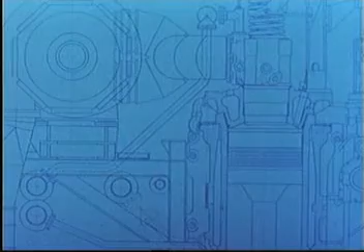The diesel engine propels half the tonnage of all the world's shipping. Given good care, the diesel engine provides a maximum of effect on a minimum of oil consumption. The engineer will see to that. At the moment, he's checking the temperatures of exhaust and cooling water.

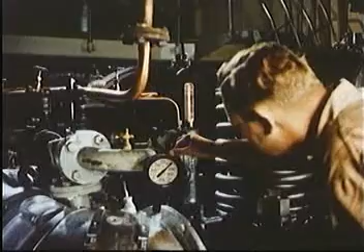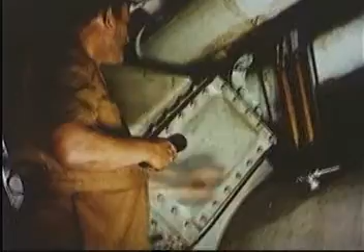His routine inspection takes him further down to the second platform with the intercoolers for charging air. Now he reaches the bottom, where his flashlight reveals the return piston cooling oil behind the sight glasses.

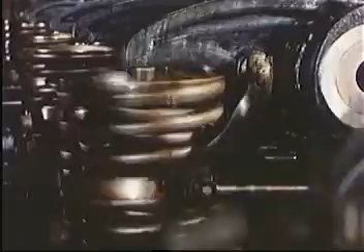To make a further study of the diesel engine, we leave the engineer and his instruments and put sight glasses on the engine from top to bottom. This reveals the movable parts: pistons, piston rods, crossheads, and connecting rod and crankshaft.

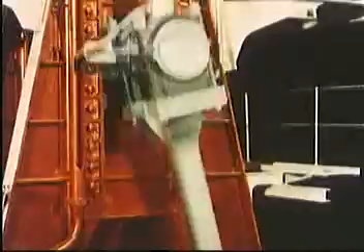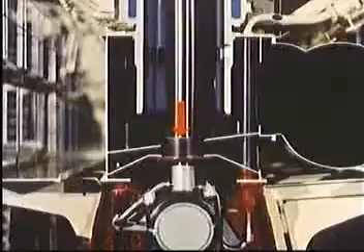This sectional view shows the function which the most important parts of the engine have to perform. In the upper part of the cylinder, an amount of fuel oil is burnt, which causes the temperature, and thereby the pressure, to rise in the combustion space. The gas pressure acts on the piston, from which the force is transmitted through piston rod and crosshead to the connecting rod, and results in a torque. The thermal energy has been converted into mechanical energy.

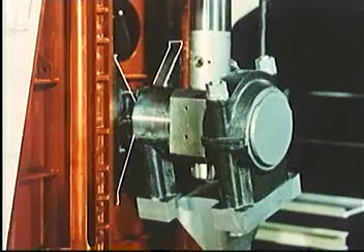In an arbitrary piston position during the working stroke, the crosshead is exposed to a vertical force from the piston rod and a force in the direction of the connecting rod, which together result in a horizontal force. This horizontal force must be transmitted to the engine frame, and for this purpose, the crosshead is provided with slide shoes supported on vertical surfaces, the guide faces on the engine frame.

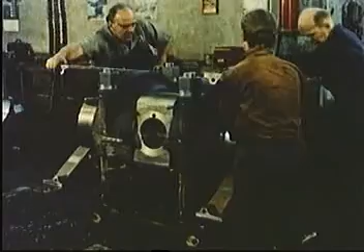Powerful forces are at work in a big marine engine, and accordingly, the engine parts are of big dimensions. In the workshop, with people providing a natural yardstick, one receives a good impression of their size. So big must the crosshead slide shoes be in order to transmit the horizontal forces. The high points in the connecting rod bearing, which have been spotted by the contact with the crosshead pin, are scraped off in thin chips.

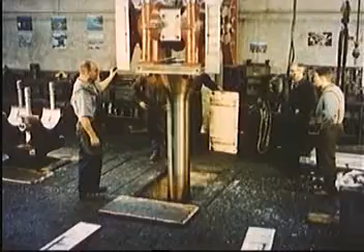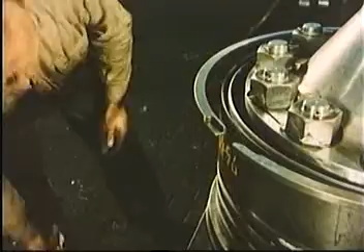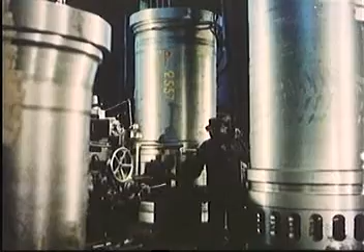To provide tightness against the high pressures, the piston is fitted with piston rings. The ring is fitted by a special tool which imparts an evenly distributed bending moment to it, thus preventing the danger of a permanent deformation. The cylinders are not easily overlooked either. The scavenge air ports are bored oblique to a diametral plane to set the scavenge air in rotation.

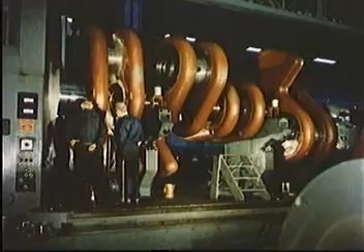The crankshaft is so big that to facilitate manufacture and installation, it's made in two halves, which are bolted together later. Each half is built up from a number of individual parts: main bearing journals, crank webs, and crank pins. The crank webs are provided with counterweights.

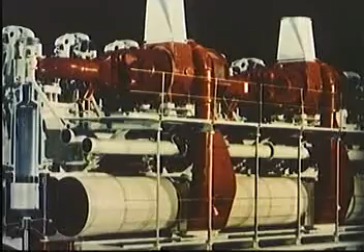Let's look a little closer at the principle on which a two-stroke engine works. Fresh air is supplied by a blower. From the blower, it's conducted in a pipe along the engine to the scavenge air space around the cylinder. When the piston approaches the end of the downstroke, the exhaust valve opens, the scavenge air ports are uncovered, and fresh air flows up through the cylinder.

Exhaust valve and scavenge air ports are then closed, and during compression, the air is heated for ignition of the injected fuel. The combustion increases the temperature and thereby the pressure which drives the piston. The exhaust valve opens, the pressure falls, and the combustion products are expelled. The air is again compressed. Fuel is injected, ignited. The gases expand. The exhaust valve opens, then the scavenge air ports. The cylinder is scavenged, and the cycle is repeated.

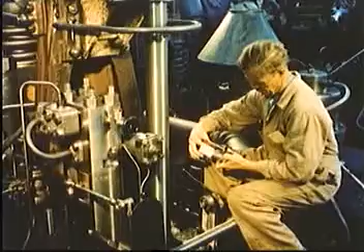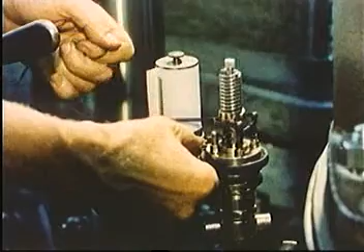The power developed by an engine depends on the pressure events in the cylinder. The pressure events can be recorded by means of an indicator connected to an outlet from the combustion space. The pencil is now moving in time with the pressure variations inside the cylinder. The drum carrying the paper is connected to the drive from the engine piston, its motion proportionate to the piston motion. The pencil records the pressure events during an engine cycle.

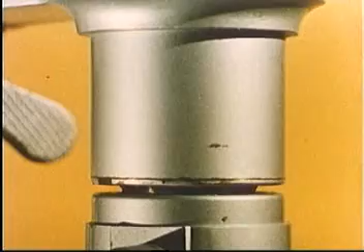The construction of the indicator is simple. Through a duct, the gas pressure is transmitted from the combustion space and acts on the indicator piston moving inside a small cylinder. The motion is resisted by a spring. This spring is exchangeable so that it may be adjusted to different pressure ranges.

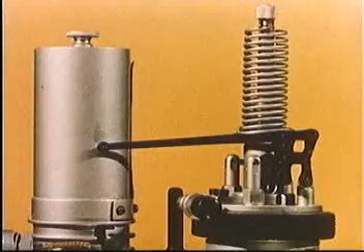The motion is communicated to a lever at the point of which a pencil is fastened. The pencil is pressed against a drum moving back and forth with the up and down motion of the engine piston. Thus, a curve is traced which shows the relation between the gas pressure in the engine cylinder and the position of the piston.

The output of an engine is dependent upon the relation between pressure and volume in the cylinders during compression, combustion, and expansion. For each separate cylinder, the indicator traces a curve, the so-called PV diagram.

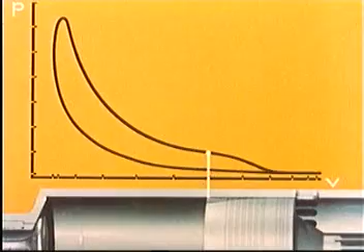The diagram shows that the pressure is almost equal to the scavenge air pressure when the scavenge ports are uncovered. The exhaust valve and scavenge ports are then closed. The air is compressed, and when the fuel is injected and ignited, the pressure will rise rapidly and remain at maximum during continued injection. After injection, the pressure in the cylinder falls to exhaust pressure, and during the exhaust period to scavenge air pressure.

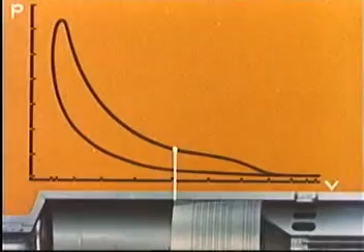Scavenging, compression, combustion, expansion, exhaust and back to scavenging. The characteristic pressures are approximately a compression pressure of 54 kilograms per square centimeter, maximum pressure 66, exhaust pressure 8, and scavenge air pressure 1.75 kilograms per square centimeter.

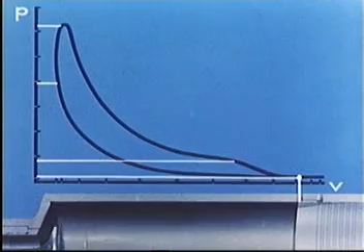From the indicator diagram, the indicated output may now be computed. At an arbitrary position of the piston during the compression stroke, there is a certain pressure, P, acting on the piston top. If the piston travels a short distance further, corresponding to delta V, and if we ignore the minimal change in pressure, the amount of work done, delta A, will be given by the pressure multiplied by the change in volume, or P times delta V. This work is represented by the area below the part of the compression line corresponding to delta V, and the same applies to every single part of the compression curve.

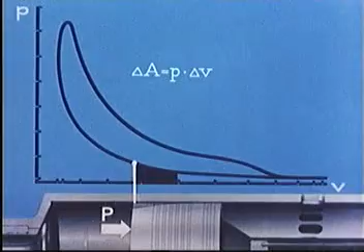That is to say that the whole area below the compression line represents all the work that the piston must perform to compress the air in the cylinder. During the expansion, the piston pressure acts in the same direction as the piston is moving, so therefore the piston receives an amount of work, and it will be seen in the same manner as before that the amount of work received is represented by the area below the expansion curve.

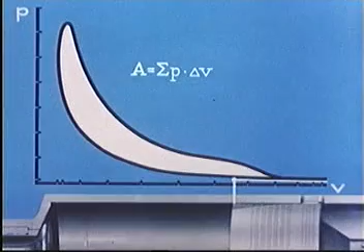The amount of work transmitted to the piston during a full engine revolution must therefore be the difference between that delivered during the compression and that received during the expansion. In other words, it is given by the area between the curves. Thus, A equals sigma P multiplied by delta V. One could imagine the same area being produced by a compression stroke under atmospheric pressure and an expansion stroke with a constant pressure on the piston. This constant pressure, Pi, the mean indicated pressure, can be determined so that it gives the same area as in the actual diagram.

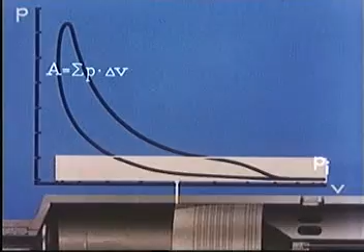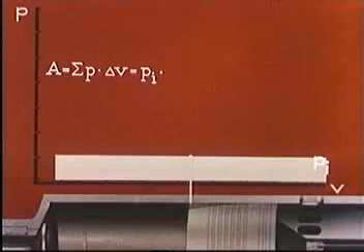In calculating the power, it is a great advantage to have to reckon only with a constant Pi during the expansion stroke, instead of the actual varying pressures in both the compression and the expansion strokes. The work in kilogram centimeters for one revolution will thus be A equals Pi multiplied by Vs, where Vs is the full stroke volume in cubic centimeters, and Pi the mean indicated pressure in kilograms per square centimeter. There is one working stroke in each revolution, so if we multiply by the revolutions per second, n over 60, we get the work in kilogram centimeters per second, that is to say the power.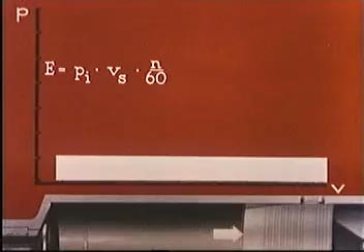Instead of Vs, we substitute the piston area multiplied by the stroke length, that is pi over 4 multiplied by d squared multiplied by s cubic centimeters. To arrive at the output in horsepower, 75 kilogram meters per second, we have to divide by 7,500, and we thus have the equation for computing the horsepower developed in each cylinder of the engine. To take an example, an engine with a Pi of 9.5 kilograms per square centimeter, a piston diameter of 84 centimeters, a piston stroke of 180 centimeters, running at 110 revolutions per minute, will have an indicated output of 2,300 horsepower per cylinder.

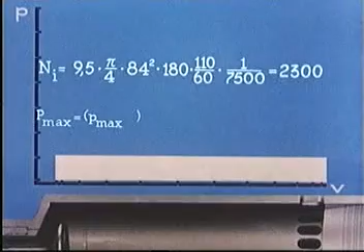The largest force acting on the piston is the highest combustion pressure less the atmospheric pressure on the underside of the piston multiplied by the piston area, or 65 multiplied by pi over 4 multiplied by 84 squared. That is 360,000 kilograms.

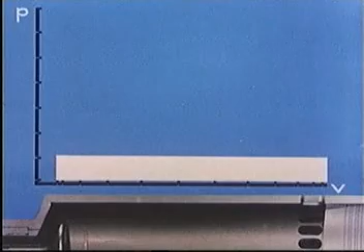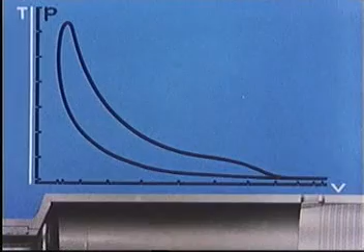The indicator diagram may also form the basis for computing the temperatures in the cylinder. Just after the scavenging, at the beginning of compression, the temperature is T0, the volume V0, and the pressure P0. From thermodynamics, we know that the pressure multiplied by the volume divided by the temperature is constant for an isolated amount of air, which is the case here in the cylinder, independent of the position of the piston, so long as the valve and the scavenge ports are closed.

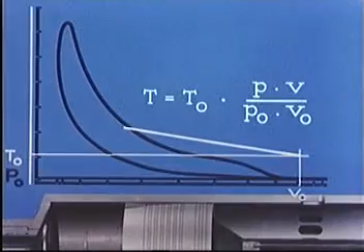The equation can be rearranged to express the temperature T direct for an arbitrary position of the piston. The indicator diagram gives us the values that are to be substituted in the equation when computing the temperature for the top position of the piston.

Substituting the initial temperature, 350 degrees Kelvin, the initial pressure, 1.75 kilograms per square centimeter, the initial volume, 950 liters, the pressure in top position, 54 kilograms per square centimeter, and the compression volume, 78 liters, we find the temperature to be 890 degrees Kelvin. The highest temperature occurs at the cessation of combustion. It is here found to be 1900 degrees Kelvin.

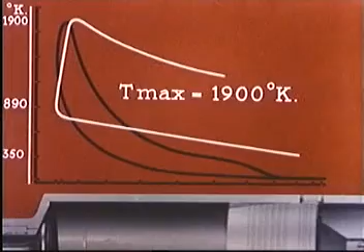In this way, the whole of the temperature curve may be calculated, right up to the moment when the exhaust valve opens. To get a better idea of what is happening, we will measure in degrees centigrade instead of degrees Kelvin. Already during compression, the temperature reaches the melting point of lead. During the first part of the combustion, the temperature reaches the melting point of aluminium. Shortly after that, the temperature reaches the melting point of cast iron. The high temperatures in the cylinders even exceed the melting point of steel.

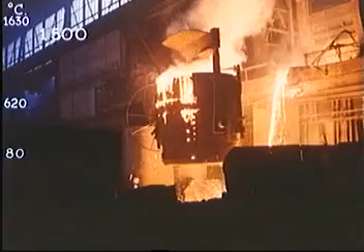Combustion takes place so quickly, however, that there is not time for the high temperatures to be transferred to the cylinder wall. The temperature of the metal surfaces will not exceed the mean temperature of the process, about 620 degrees centigrade. Then again, the cylinder is made of cast iron, which begins to lose its strength already at around 300 degrees centigrade, besides which the lubricating oil will lose its lubricating ability if it becomes too hot.

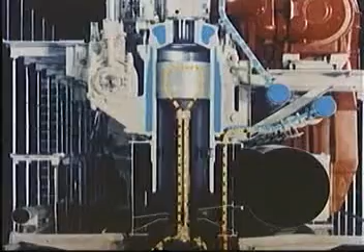It is therefore necessary to provide efficient cooling, partly with oil or water led through the piston rod up into the piston itself, and partly with water circulating through the cooling jacket around cylinder and cylinder head. If a cooling water temperature of about 70 degrees centigrade is maintained, we can prevent the temperature on the inside of the cylinder wall from exceeding 300 degrees centigrade. This is possible because there is a drop in temperature as the heat passes from air to metal.

The gas molecules are in violent motion inside the cylinder, but out near the wall they are slowed down and form an insulating layer. This causes a rapid fall in temperature at the boundary between gas and metal. Through the wall itself the temperature falls evenly, but as the heat flows into the cooling water, there is again a sudden drop in temperature owing to the retarded motion of the water molecules in contact with the wall.

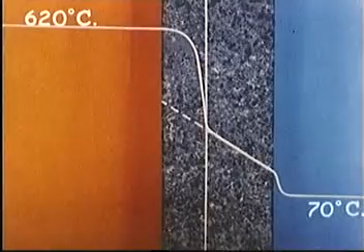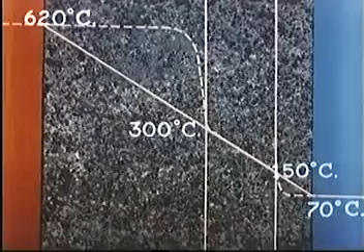The mean temperature of the gas is 620 degrees centigrade, and the cooling water is kept at 70 degrees centigrade. It is possible to calculate a thickness of iron that offers the same resistance to heat flow as the boundary resistance between air and cylinder wall, and similarly a thickness of iron that corresponds to the boundary resistance between cylinder wall and water. As the drop in temperature through the entire homogeneous iron wall will occur evenly, the temperature of the original cylinder wall can be determined. These temperatures, which are calculated for the hottest point in the cylinders, explain why the materials are able to withstand the high combustion temperatures.

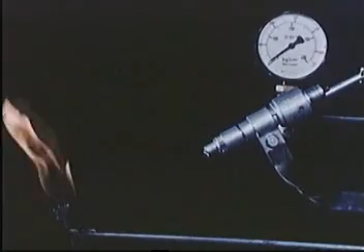The indicator diagram shows that the combustion in the cylinders occurs within a fraction of the time of a revolution. Within this fraction of a second, defined by the flashes, 50 grams of oil must be burned. A strong atomization of the oil is a condition for the short time of combustion. Without atomization, the oil will not ignite at all, even though the stream passes right through a flame. If the pump pressure is raised to 80 atmospheres, the oil is more finely atomized, but not enough to ensure reliable ignition.

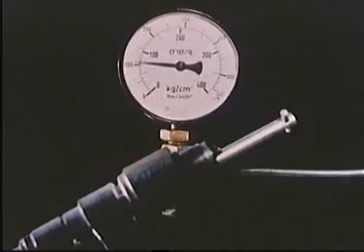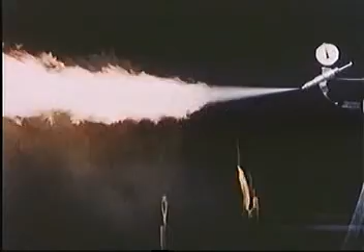At a pump pressure of about 200 atmospheres, the atomization is so good that all injections are ignited. At the same pressure and continued injection, a flame is formed. But the flame soon dies out owing to lack of oxygen. Not until air is admitted through the pipe in the lower part of the picture can the flame be kept burning. The flame is formed some distance from the nozzle. The distance between nozzle and flame is about 4 decimeters. This corresponds to an interval of 1/400th of a second from the start of injection to the start of ignition, the delay period. In the hot engine, the ignition delay is approximately half.

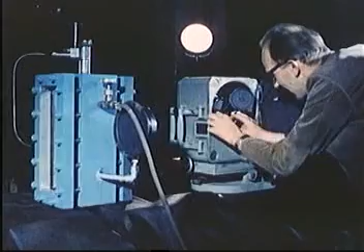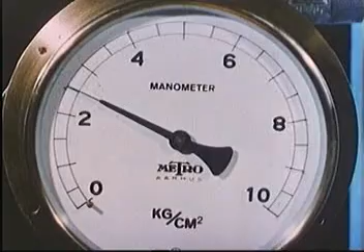An experimental setup with a pressure chamber and a high-speed film camera taking 3,000 pictures per second will show the dependence of atomization upon the friction between oil droplets and air molecules. First, a vacuum is created in the pressure chamber, and the high-speed camera shows the appearance of the stream before it hits the bottom of the chamber. Then the vacuum is succeeded by a pressure of 2 atmospheres, and the high-speed camera registers the stream, which now has smaller droplets and a wider spray angle. The friction with the air molecules will be greater and atomization better when the oil is injected under high pressure.

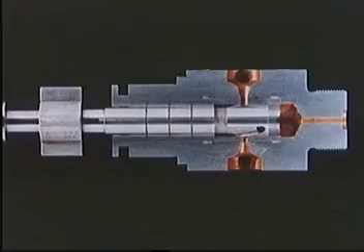In the diesel engine, the pressure is produced by a fuel pump. The oil is taken in through a ring chamber, from where it is drawn out into the pump barrel, connected by a hole in the front of the plunger, to a milled-out recess in the plunger.

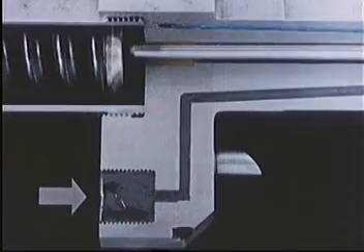The oil flows from the pump through a filter to a closed duct in the fuel valve. A heavy spring presses on the needle valve, which bars further access to the nozzle. The rise in pressure begins when the plunger has closed the inlet port.

The oil presses on the conical end of the needle valve, lifts it a trifle, whereby the pressure area is increased and the needle snaps up. The oil now streams out through the nozzle holes at a very high velocity, resulting in a fine atomization.

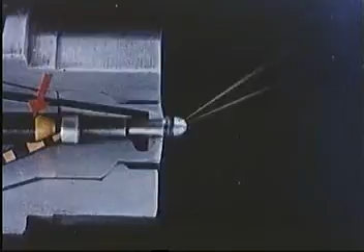When the helical groove of the plunger passes the inlet port, the oil may flow freely back into the ring chamber during the continued movement of the plunger. The moment the plunger uncovers the inlet port, the oil pressure falls and the valve spring snaps back, pressing the needle into its seat so that it shuts off access to the nozzle.

The helical groove on the plunger makes it possible to regulate the amount of fuel. If the plunger is turned in one direction, the useful stroke of the pump will be increased. If turned in the opposite direction, it will be reduced.

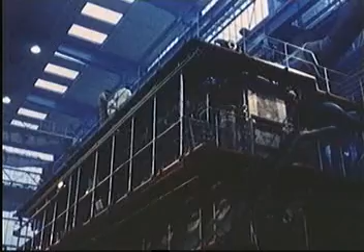Not all the energy contained in the oil results in mechanical work. The process incurs losses. The losses may be localized by drawing up a heat account, a heat balance. For instance, for this engine, which is erected on a test bed and provided with the necessary measuring instruments. The engine is receiving a final checkup and adjustment.

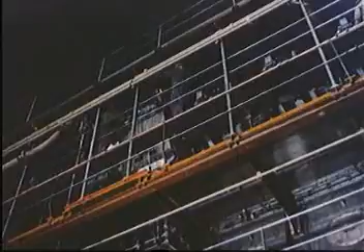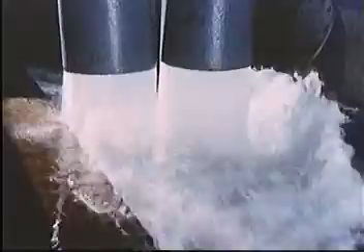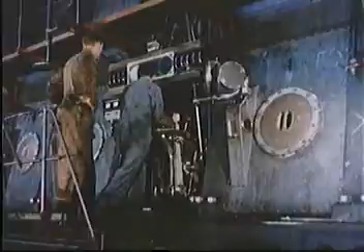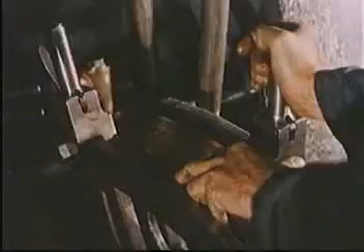Before the engine is started, cooling water and oil are turned on. Also, compressed air is needed for the starting. The control lever is moved, regulating the fuel pumps for increased injection. The speed of revolution is rising.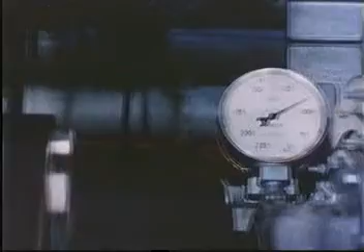The engine has now reached its full RPM, and we are able to find the power by means of the torque registered here on the dynamometer. If at the same time we measure the consumption, the air and cooling water quantities, and the temperatures, a heat balance can be drawn up.

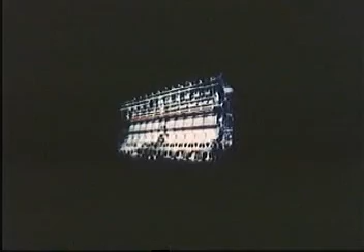Let us imagine the engine as being isolated in a box. The energy admitted to and rejected from the box is ascertained for use in the heat balance. Whatever else happens inside the box is irrelevant to the heat balance.

Energy is admitted from the fuel tank in the form of fuel oil. Thermal energy is carried away by the heated cooling water. Thermal energy is also carried away in the hot exhaust gases. And mechanical energy is absorbed by the dynamometer.

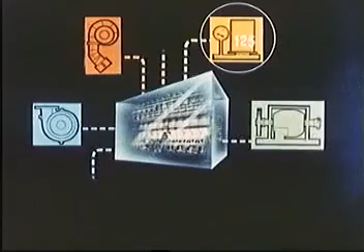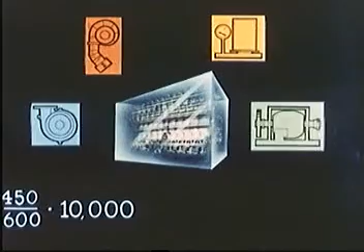If by weighing we find the amount of oil consumed in 10 minutes to be 450 kilograms, we are now able to calculate the thermal energy admitted per second. It will be 450 kilograms divided by 600 seconds multiplied by the calorific value of the oil, 10,000 kilocalories per kilogram, giving 7,500 kilocalories per second.

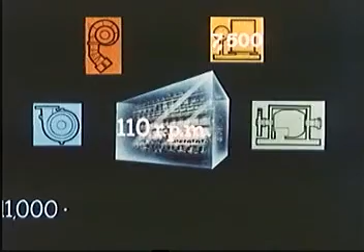The energy produced is determined by the speed of the engine, 110 RPM, and the brake torque registered on the dynamometer as 111,000 kilogram meters. The power will be the torque multiplied by the angular velocity. To obtain the result in kilocalories per second, we divide by 427. The result is 3,000 kilocalories per second.

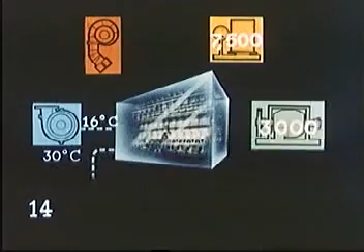The energy carried away by the cooling water is determined by the temperature rise, 14 degrees centigrade, multiplied by the quantity of cooling water, found to be 123 kilograms per second, that is 1,720 kilocalories per second. In a similar way, the energy discharged with the exhaust gases is calculated from the rise in temperature, the amount of air, and the specific heat, and found to be 2,700 kilocalories per second.

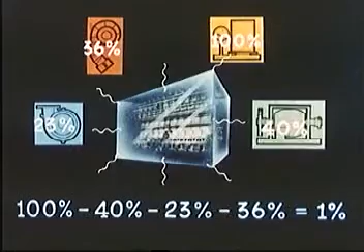A clearer picture is obtained by converting the figures into percentages of the energy admitted. Drawing up the account, we see that there is a discrepancy of 1% on the loss side. This loss of energy is ascribed to the radiation of heat from the engine, which we have not been able to measure, plus unburnt constituents in the exhaust gas.

It will be seen that the efficiency of the diesel engine is about 40%, which is more than can be attained with any other type of heat engine. The efficiency is a deciding factor in how far a ship is able to sail on a certain quantity of fuel.

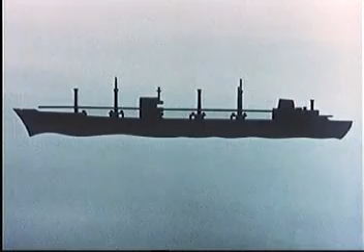If a diesel motor ship can sail 2,000 nautical miles, a steam turbine ship will sail 1,500, and a ship with gas turbine 1,000 nautical miles on a given quantity of fuel.

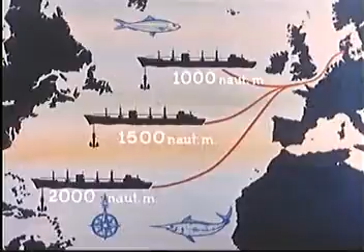The engineer is still on his job, securing a long life for his engine by checking and testing. And one thing more, by knowing the meaning and function of every little detail of his engine.